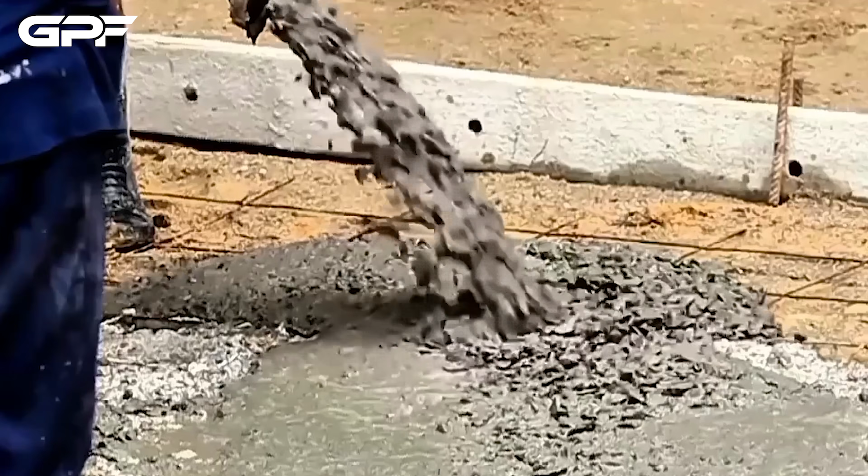Up to floor 167, it will be standard concrete supertall construction. But the moment the structure passes that threshold, everything will change. The pouring of concrete will stop completely. The tower will undergo a radical transition into a pure, lightweight steel skeleton.

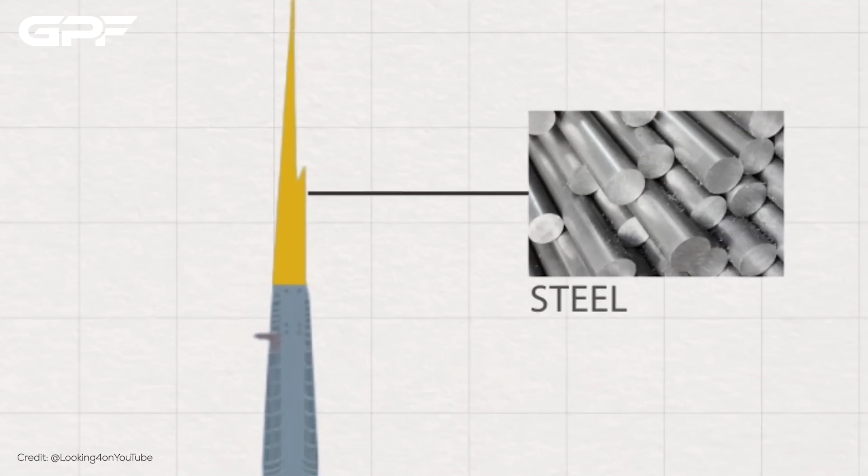This is not a creative choice. It is a complete surrender to the laws of physics. Pumping heavy concrete any higher will simply be structurally impossible.

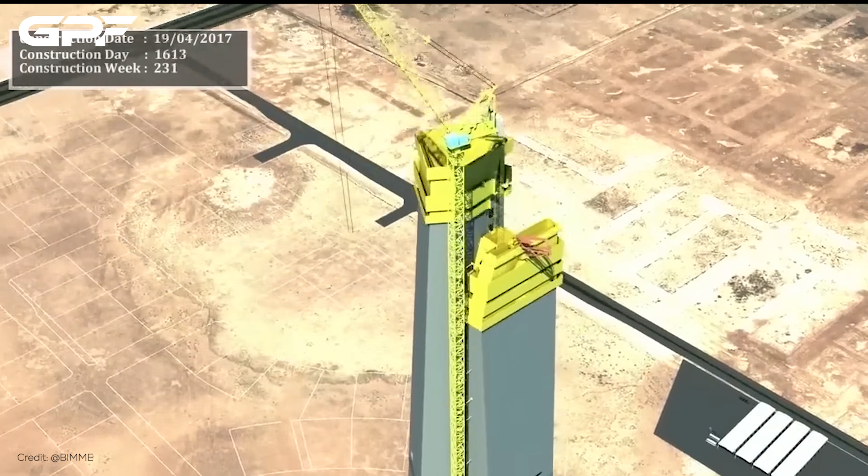As a result, above floor 167, nobody will live, nobody will work, and nobody will visit. The tower will essentially stop being a conventional building and morph into a giant hollow steel cage. The interior will contain absolutely nothing but a dizzying maze of vertical steel ladders designed for the sole purpose of allowing maintenance crews to climb hundreds of flights of stairs just to change the aircraft warning lights at the summit. That will be 240 stories of climbing for a light bulb.

Now look at the estimated numbers that will define this illusion. Engineering models reveal that the Jeddah Tower's empty steel spire will stretch upward for well over 300 meters. To put that into perspective, the entire Eiffel Tower stands at roughly 330 meters. The empty, hollow, uninhabitable tip of this single skyscraper will be the exact same scale as an entire national monument sitting on top of another skyscraper.

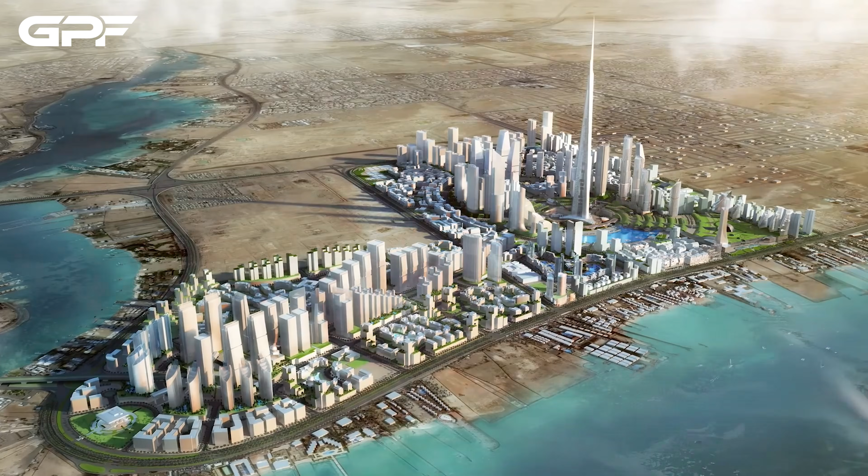Yet, thanks to the measurement rules, every single one of those 300 empty meters will be counted toward its historic world record. It will be an engineering structure optimized purely for a future marketing headline. But the relentless pursuit of that headline almost destroyed the project entirely.

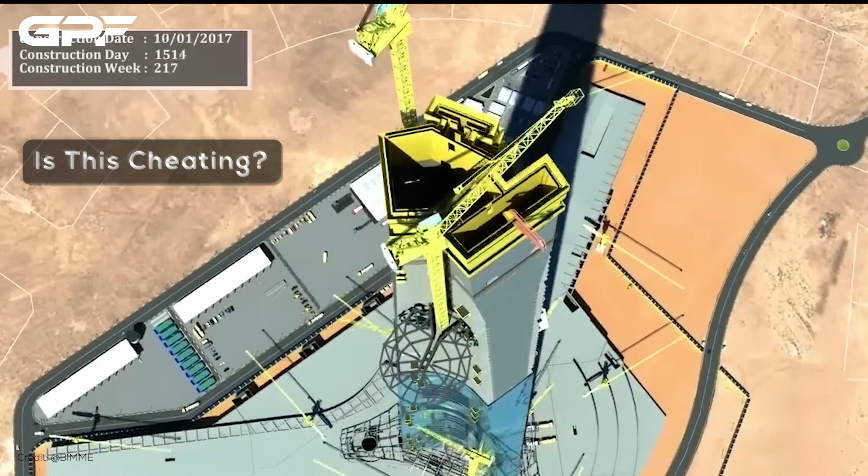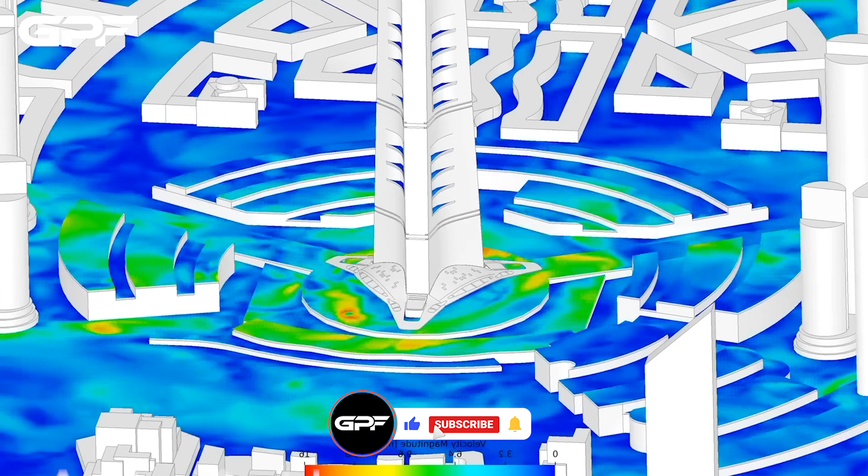When you look at a 300-meter hollow spire built strictly to break a record, the word cheating comes to mind naturally, but engineers have a real defense. At extreme altitude, a hollow steel spire acts as a pressure valve, letting violent winds pass through the structure. Rather than slamming into it flat, it genuinely reduces sway in the floors below. So the spire has a function. Engineers aren't lying, but there is a difference between a 50-meter functional spire and a 300-meter one.

Dubai built the Burj Khalifa with no land shortage. They built upward to rewrite their national identity from a quiet port into a global destination, and it worked. Jeddah Tower is the same bet, not a housing solution, a flag planted in the desert sky.

But here is what nobody can agree on. Is a flag a building? And if the record belongs to a flag, what exactly are we measuring?

When Jeddah Tower finally claims its crown, it will be celebrated as the tallest structure ever built by human hands, but not the most usable, not the most floors, not the highest occupied space. A hollow steel skeleton built within the rules of a loophole will carry the title.

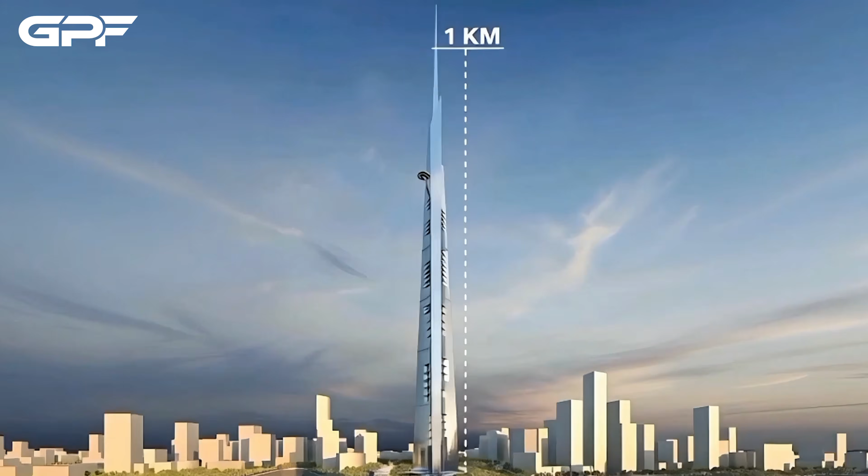Maybe that's fine. Pyramids, cathedrals, monuments nobody lived in, built simply to say, we were here, we reached. Or maybe the record is broken and nobody wants to say it. Jeddah Tower will touch 1 kilometer, but is that a building or just a very expensive number?